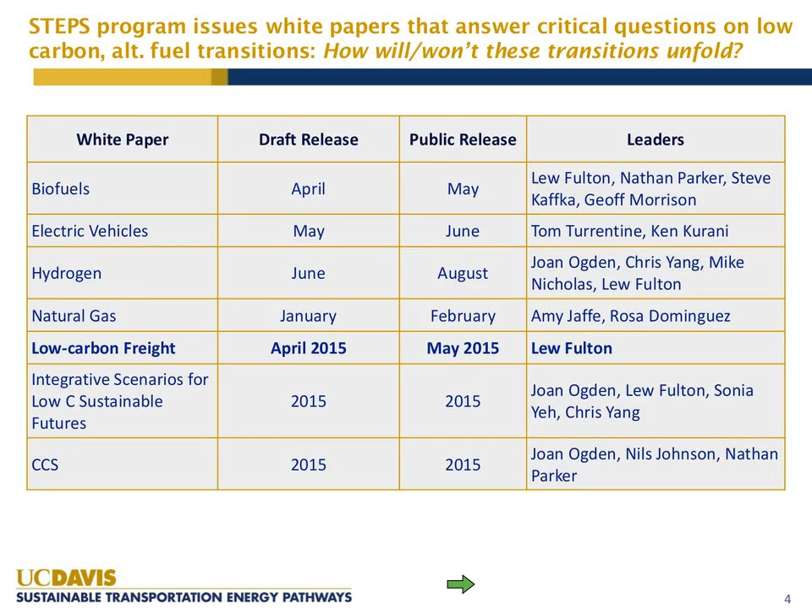Today we want to talk about this sustainable, low-carbon truck project that we've been undertaking. This is part of a range of different kinds of freight research we're doing here at UC Davis. I'd call this a high-level view at what technologies and fuels are available and what the barriers and challenges are to achieve a very low-carbon future in trucking in both the United States and California, looking out to 2050. We also look a little at the policy implications of our scenarios.

These are the team that's been involved. It's really been myself and Marshall who've been the main authors here, so we're the ones on the hot seat and have to apologize for any errors. But we've had a lot of data inputs from others within our program, and of course from outside the program we've drawn on a lot of important literature. We've also used a model developed by Ben Sharp while he was a student here, which has been very helpful.

Why do we care about trucks? An important reason when it comes to energy and CO2 emissions is that although they don't use as much energy in the United States as light-duty vehicles, they are growing more rapidly. In fact, light-duty vehicles are pretty much in a flat energy use phase and are expected to decline. This is the brand new AEO, the Energy Information Administration AEO 2015, and we see that the big growth in energy use is expected to come from trucks - everything from light commercial trucks up through the big Class 8 long-haul tractor-trailer trucks, and it also includes buses. Those are all included in our study that we'll be presenting today.

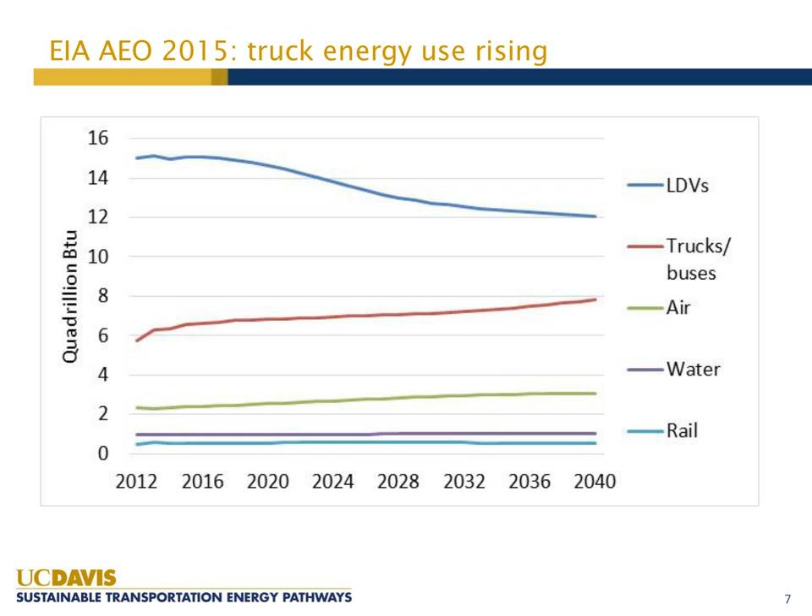So it's clearly where the growth is expected to happen. And of course this is energy use, so it's after what the EIA thinks would happen in a baseline world in terms of truck travel growth, which is even higher. In fact, in the U.S. context, the EIA projects about a 70% increase in truck travel growth between 2012 and 2050. It's somewhat lower in California, according to the ARB Vision projection, although they have new projections coming out soon.

The study that we're presenting today really zooms in on parts of a much bigger set of issues.

Okay, apparently I'm not clear. I'm going to speak a little more close to the mic. Usually I'm so loud that it's not a problem, but okay, I'll be louder.

We are basically taking as a starting point the potential effort to reduce greenhouse gas emissions from trucking in the U.S. and California by 80% in 2050. This is a stated goal in California, and President Obama has stated it as an important target for the United States. Then yesterday we had the executive order from Governor Brown to meet a 40% reduction below 1990 levels of greenhouse gases in California by 2030. We have not looked at that target specifically, although we will show you something about meeting that target in this paper, and we may in the next week try to quickly backfill a little bit to show what our scenarios have to say about that kind of 2030 target.

What we're not trying to do here is look at a range of potentially very important measures to change the amount of truck travel and the in-use efficiency of truck travel, which could be achieved through things like intelligent transportation systems, automation, better traffic management, and information and communication technologies for logistics. All of that stuff is outside the scope. We're focused on accepting a certain truck travel trajectory and how you could use vehicle and fuel technologies, including efficiency and alternative fuels, to achieve low greenhouse gases. So an important follow-on to what we're doing would be to try to better understand the contribution we could have from these other measures.

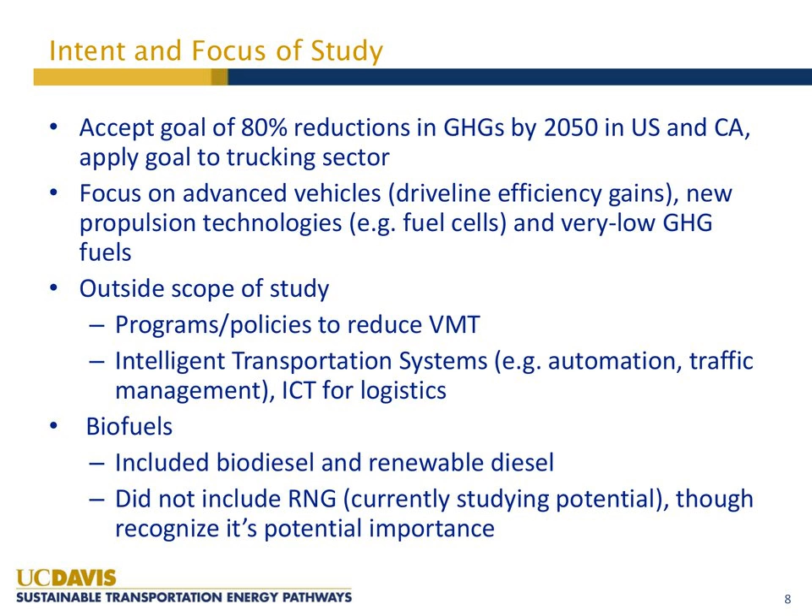Okay, so that is the backdrop. Here's a punchline up front, because I can already tell it's 10 after, so we're going to have to speed up a little bit. This is the high-level results of two scenarios, the main two scenarios in the paper, and we'll try to explain how we get to these scenarios in the coming slides.

You see 2010 for both California and the U.S., and please notice that the right-hand axis is, for the U.S., showing that we're talking about 10 times more fuel in the U.S. than in California in 2010.

And in 2050, we have a high ZEV scenario, which is attempting to reach the 80% target almost entirely through the penetration of fuel cell vehicles and electric vehicles in trucks. Incidentally, we do not assume any electric long-haul trucking. That's certainly something we could talk about, but for heavy-duty short-haul trucks, it's all fuel cells. And then there's a lot of electrification in medium and light commercial trucks.

We also have a mixed scenario, which cuts the penetration of ZEVs by half, and the rates of penetration start later, and we make up for that with the adoption of quite a significant amount of biofuels.

And in this slide, we show that the biofuels at the U.S. level would be about a doubling of the current biofuels used in transportation, and would be very different than the ethanol that dominates today. These would be drop-in renewable diesel types of fuels, and they would have to come from cellulosic feedstocks, or at least very low carbon net greenhouse gas pathways by 2050.

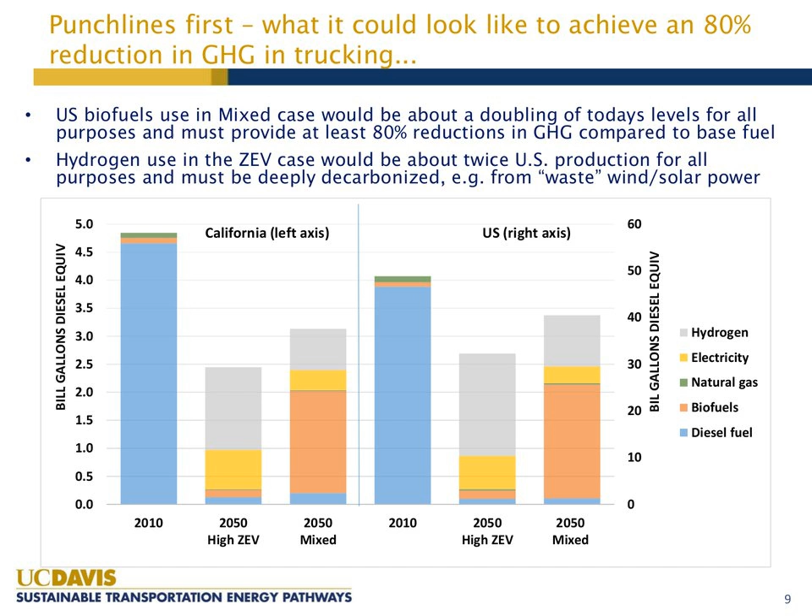Okay, I'm going to now hand it over to Marshall for the next few slides.

So the trucking sector is fairly complex and includes a variety of different truck types that all have fairly distinct characteristics. There's long and short-haul trucks, the Class 7 and Class 8, very large trucks. Long-haul trucks drive very high mileage, and the vast majority of that is highway travel. Short-haul trucks drive high mileage, but nowhere near as high as long-haul, and their travel is typically much more urban, a lot of low speed, and a very significant amount of idling.

Those short-haul trucks include what we call port trucks as well. There's heavy and medium-duty vocational trucks - those are refuse trucks, trash compactors, bucket trucks. They also have very different drive cycles, very low fuel economies, typically medium levels of mileage per year. There's medium-duty urban trucks, which are delivery trucks, FedEx, UPS trucks, again, medium mileage per year.

Buses - those are transit, shuttle, and coach. Transit buses typically drive at relatively low speeds, urban travel, lots of stops and starts. Shuttles and coaches are a little more light-duty vehicles.

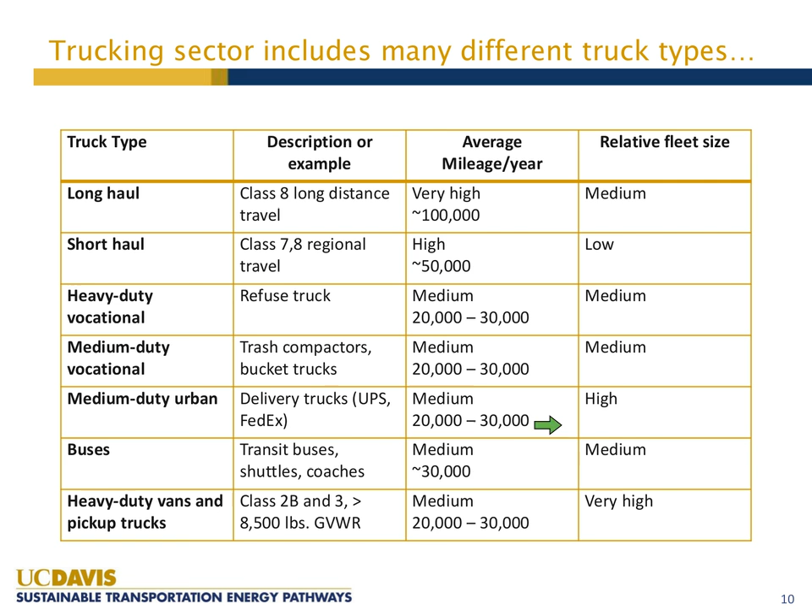Okay, so these trucks will use a variety of technologies and fuels. Right now, the entire trucking sector is dominated by conventional diesel and gasoline vehicles. The problem with these is they have relatively high emissions of greenhouse gases. There is some commercial natural gas trucks, hybrid trucks. The natural gas ones are typically in buses and in the medium-duty urban delivery trucks. And fuel cells and battery electrics are in demonstration programs and not really commercial at the moment.

And all of these technologies and fuels have a large variation in efficiency, potential efficiency, and they all have various issues or barriers. For example, with fuel cells, the hydrogen infrastructure is lacking. There's a question of whether, for a number of the trucks, the current fuel cell engines can last the lifetime of the vehicle, so presumably over time that technology has to increase to allow that to occur.

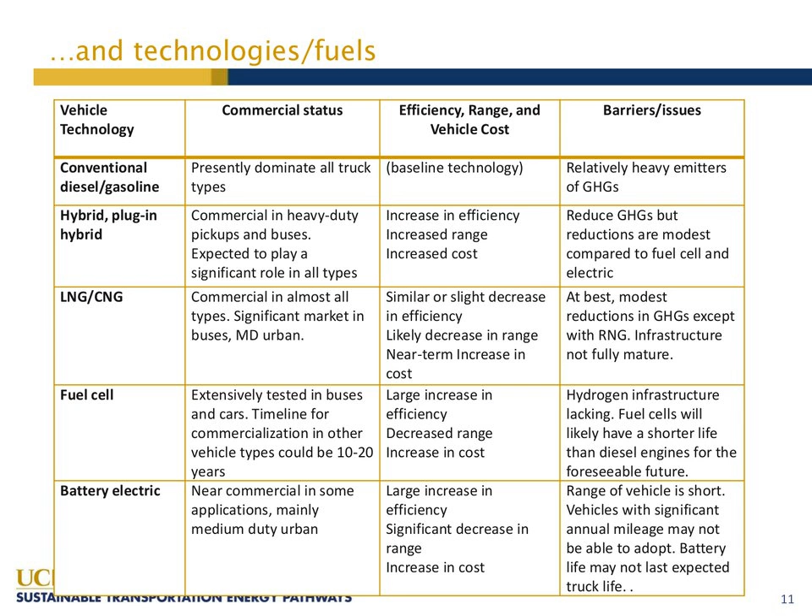For all the highway travel, the advantage of hybridization is not so large for this type of truck.

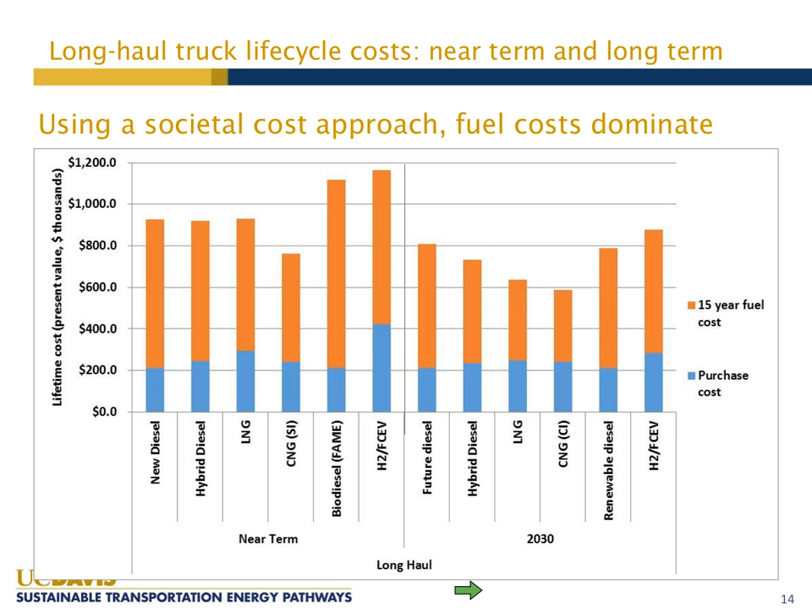But I think the main message here is that none of these technologies, especially in the long run, when you take into account 15 years of fuel at a 4% discount rate, look particularly—there's no showstoppers here in terms of cost. I think in the near term, the costs of biodiesel and fuel cells would be pretty high, but in the long run, these costs come down. It does depend, especially for fuel cells, on reaching high volume and a lot of learning over the next 15 years.

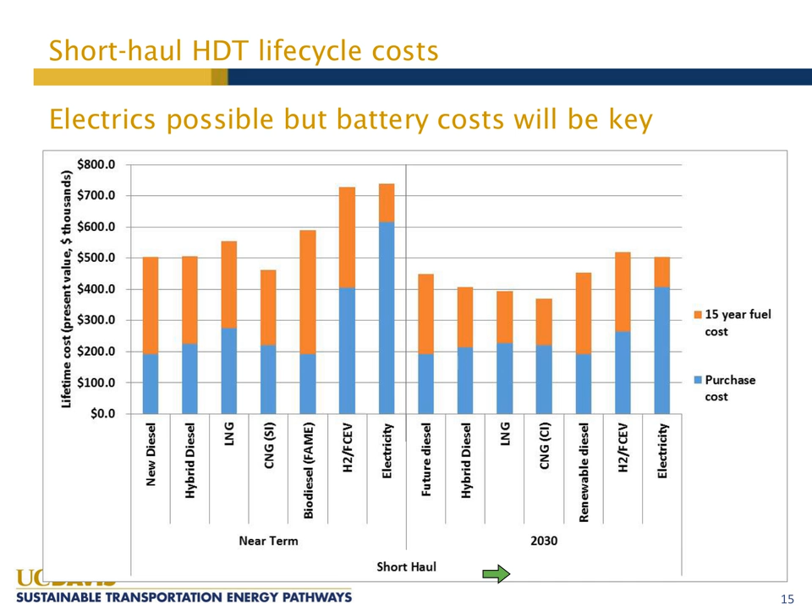And you see that electricity and hydrogen fuel cells are pretty expensive in the near term. But again, this comes down quite a bit over time, and they're not nearly as much more expensive by 2030.

So we are assuming a deep decarbonization of the electricity grid, which helps both hydrogen and electricity. There may also be the possibility of producing hydrogen from excess wind and solar, and that's a very interesting sub-pathway where you might have enough wind and solar available to produce almost zero-carbon hydrogen, because the electricity isn't needed from those power sources at certain times of day.

And then for biofuels, we're assuming 100% very low greenhouse gas renewable diesel, and that's certainly a controversial area. I think the big question is how much of that can you expect to have, and you need a lot in this scenario.

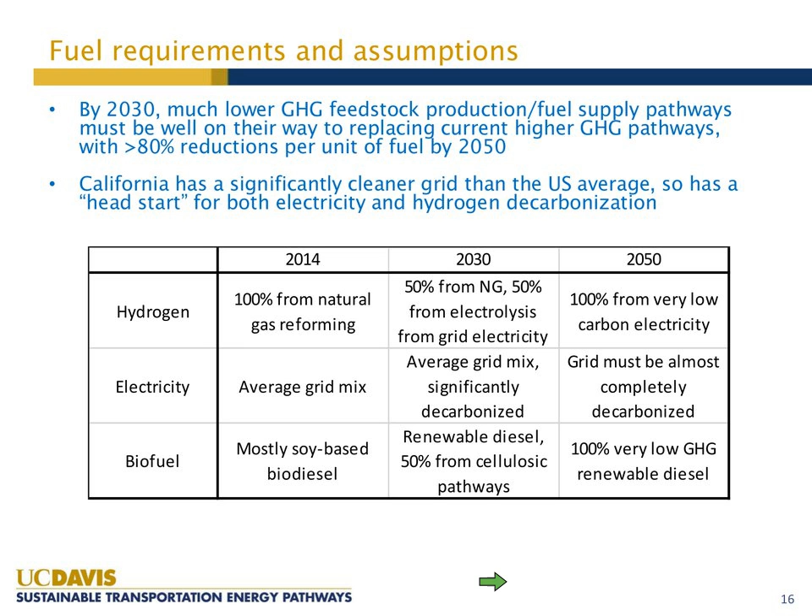And then 2030 is sort of in between. We're assuming you're about halfway in this transition, and that your grid, electricity grid, is partially decarbonized. You're getting a lot of renewable diesel, and you're getting a lot of hydrogen through electrolysis by 2030. It's important to be well on the way in this kind of transition.

And if you can do this, you get these pictures of CO2. I don't have time to spend a lot of time on this slide, but you get by 2030 for both long haul and short haul fairly deep decarbonization, especially for advanced biofuel and hydrogen fuel cells, and by 2050 it would be even lower. But you've already made a lot of progress by 2030 in the assumptions we're making here.

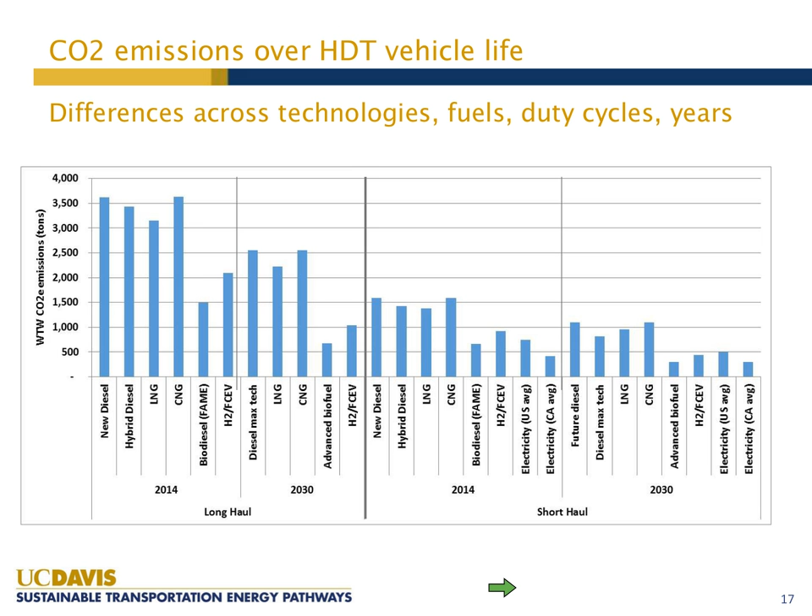Couple of slides on what happens to the cost when you put those CO2 numbers in there. This is with a $50 per ton carbon value, and we're saying this isn't a game changer, although in the 2030 numbers, it almost is a game changer.

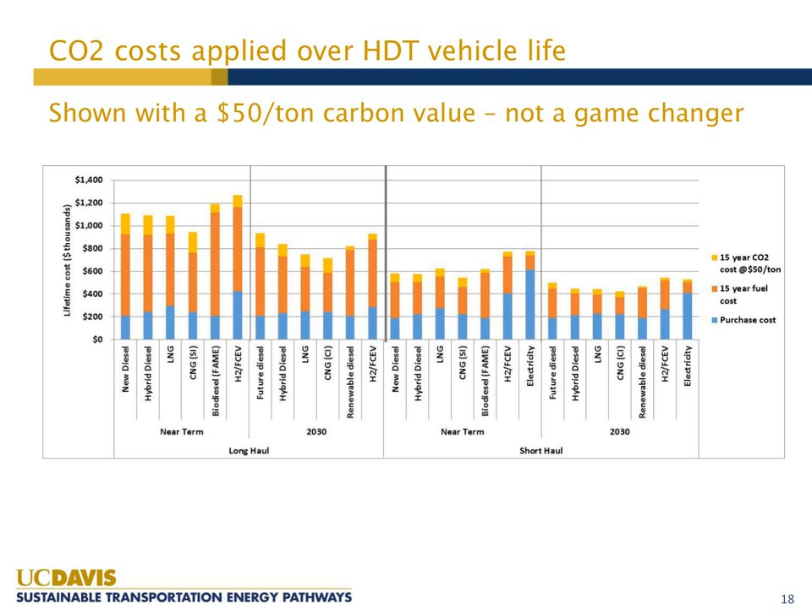This carbon CO2 cost for diesel would be high enough that it makes advanced biofuels and fuel cell vehicles for long-haul trucks pretty competitive, and it's more or less a similar story for short haul. It would be fun to talk about this more, but we're going to move on to the scenarios that we made, and back to Marshall.

So the truck scenarios we carried out, we used the TOP HDV model. These scenarios are not meant to be a prediction of the future. They're meant to explore what would happen if you chose a particular pathway aiming at the goal of 80% reductions, and to find out what you would have to do to reach that goal.

So in these scenarios, we use vehicle stock, vehicle miles traveled for each truck type through 2050, and we modify sales of new technologies to enter into the fleet in order to reach the goal at 2050 of the 80% reductions. As mentioned, we looked at two pathways. The first pathway is heavily ZEVs.

A major advantage is that not only can you reduce greenhouse gases significantly, but you also reduce criteria pollutants significantly, and that's very important in California. The vehicles are initially very expensive, and as I mentioned, fuel cells are lacking in hydrogen infrastructure. The electricity and hydrogen for the ZEVs need to be produced almost exclusively renewably to get the carbon content down very low.

For the biofuels and ZEVs mix, the benefit is that you do not require new vehicles. Essentially, the biofuels are drop-in ready, so any changes you make are slight modifications to the diesel trucks, and no other modifications are necessary for the fuel. One concern with biofuels is it's not clear how much low-carbon biofuel is available, especially in the quantities needed for trucks and other vehicles to potentially meet the 80% reduction. It's also unsure, well, the estimates of actual carbon emissions from biofuels have large uncertainties.

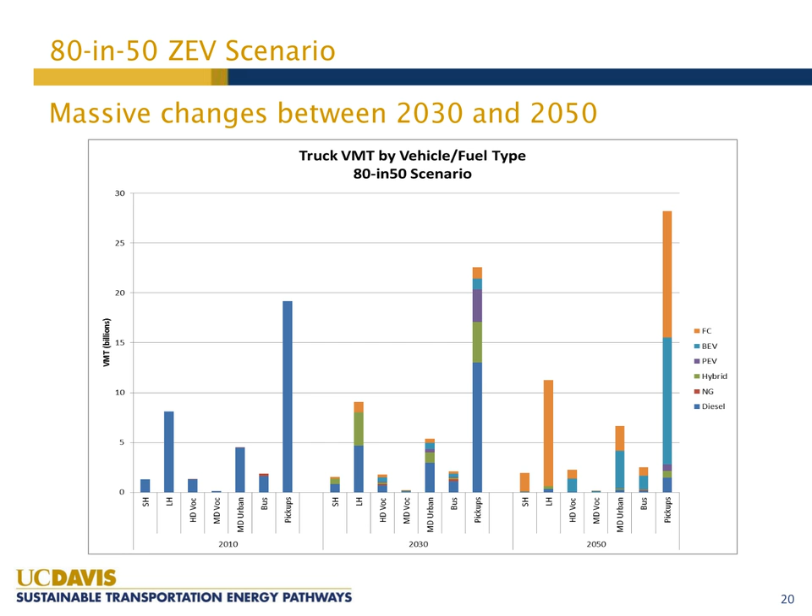You also start to see some battery electrics and some fuel cells, the fuel cells being the orange and battery electrics the lighter blue. At that moment, in 2030, you still have very modest VMT or fleet stock penetration. By 2050, you see almost a complete overhaul from 2010, but also a very significant overhaul from 2030 - almost all the VMT is taken by fuel cells or battery electric vehicles.

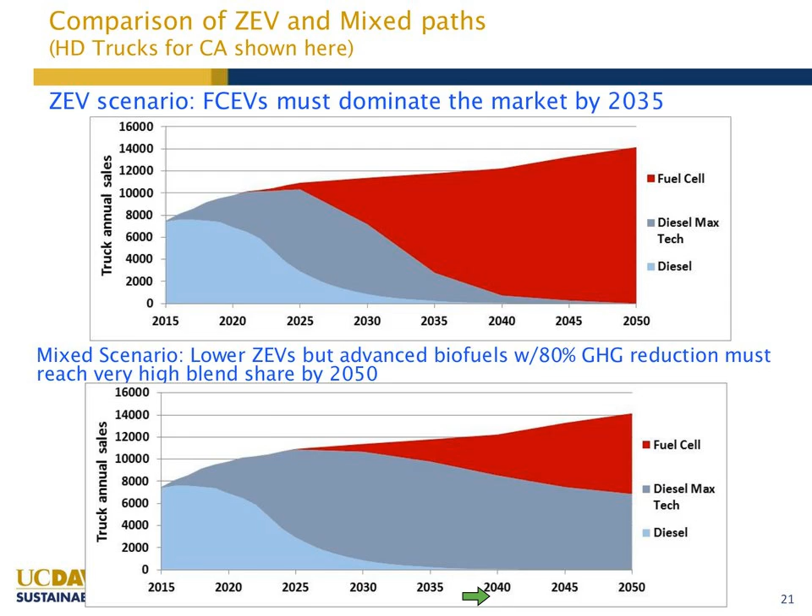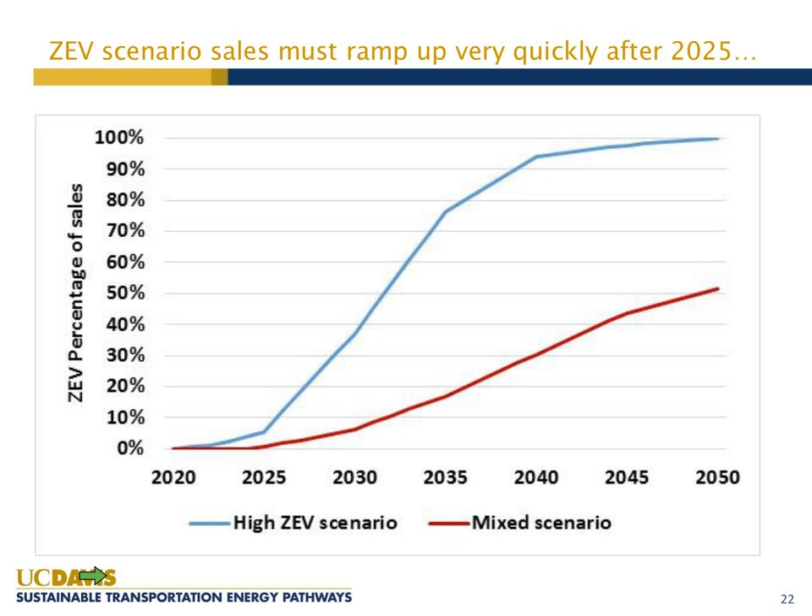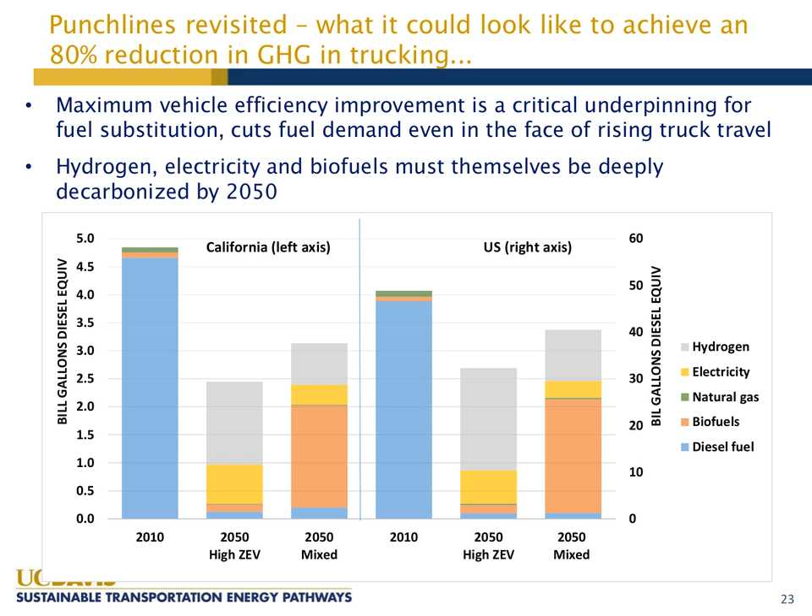Clearly, these are very challenging scenarios, and this is not going to happen without very strong underpinning of policy. Of course, the policymakers in California and Washington realize this, and we have a very interesting freight strategy being developed by ARB, for example, with a lot of elements that speak to trying to get on track for this kind of scenario.

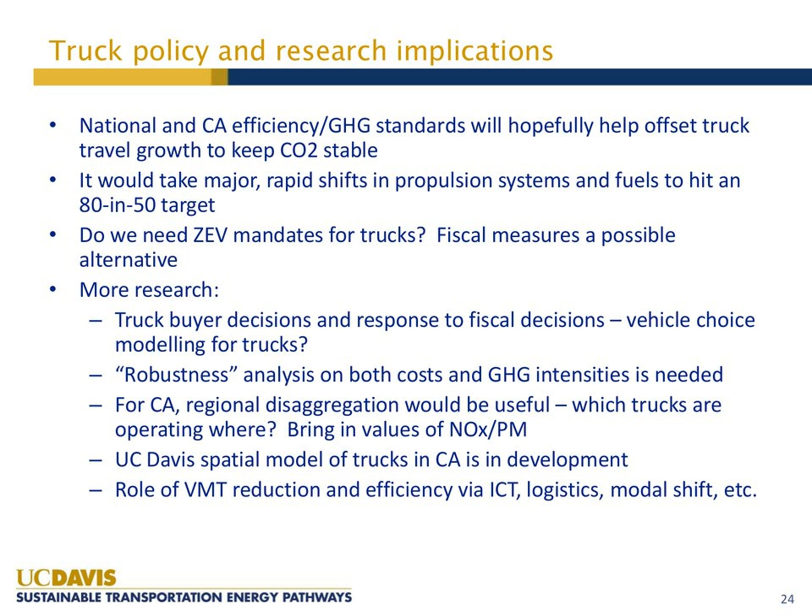Well, we have very little hydrogen use today for trucks. Apart from some fuel cell hydrogen buses, and probably some trucks in fleets, I'm aware that some companies are interested in introducing fuel cell trucks in the next few years. So it's really a nascent situation for hydrogen in trucks as well as for cars.

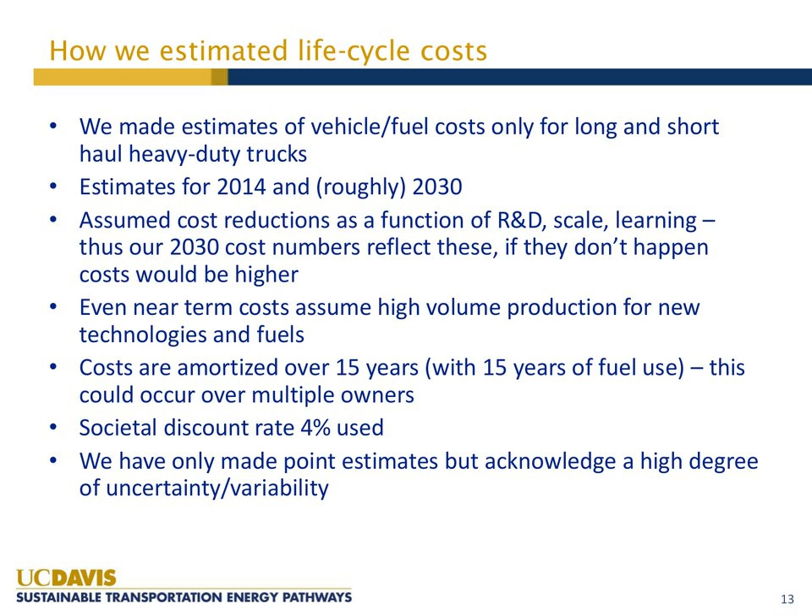Now, we are getting a rollout this year in California on the car side. It's going to be very interesting, and this could help us begin to develop a hydrogen refueling infrastructure that eventually could be useful for trucks. So there is that connection, but there's a big lift here in terms of providing that refueling infrastructure, and on the vehicle side.

Another question we received from the audience is about fuel costs, and won't that drive efficiency improvements without any additional greenhouse gas standards? We'd like a comment on that.

That links to something else one of our respondents said. I forget who said it, but the greenhouse gas and fuel economy standards are really important because, in fact, I don't think that fuel prices are going to make this happen all by themselves.

Now, it's possible that if you had very high fuel prices you would get a big response from truck companies and truck purchasing behavior. But basically, truck companies look for relatively low payback times. They're trying to make investments that pay back within a couple of years, and that's not going to give you anywhere near the efficiency improvements that you get through standards.

I think the big question is whether the national and California standards, as they develop, are going to be strong enough to really push us into new technologies, as one of our respondents said. We may see some plug-in hybrid type vehicles come along as these standards get tougher. Would we see fuel cell vehicles from that? I'm not confident. I think it would take a long time before efficiency-based standards would push you that far, so that's why you might need complementary policies.